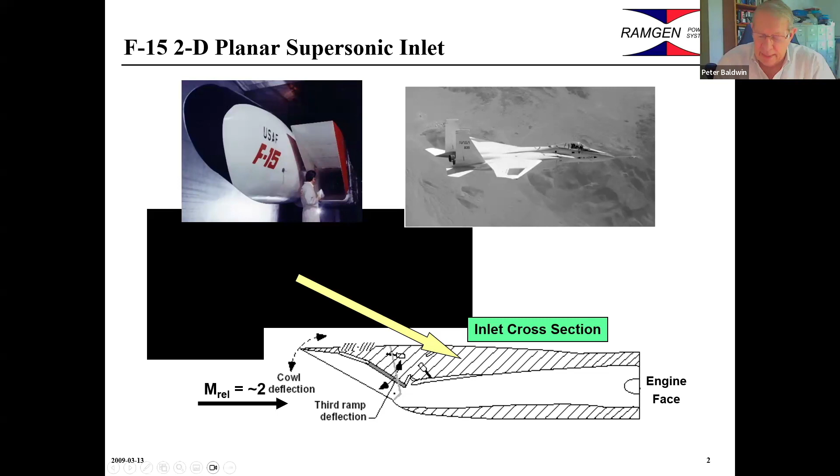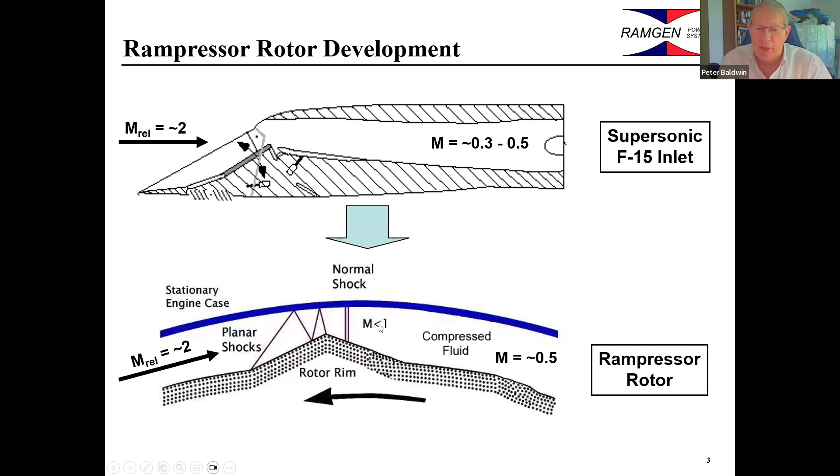The technology uses supersonic platforms, not unlike this F-15 inlet structure where you see the ramp-like structure - this is a supersonic compressor. So what Ramgen did is take that compressor shape and put it on the rim of a disc, then you turn the disc with a motor, and you end up with a developed compressor. You can see this is Ramgen material, showing the attempt to generate and control the shock and use it to boost the pressure.

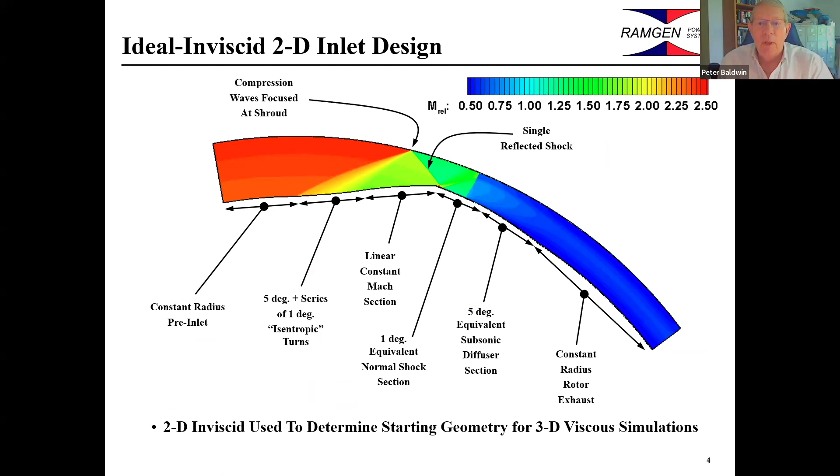We were funded by the Department of Energy to develop the compressor technology, and you can see an artist's rendition of the ramp and the rotor. We talked about it as a single stage compressor technology driven by an electric motor, and we were able to talk about pressure ratios of 10 to 1 on a single stage compressor, which was remarkably high in its day. We were in the midst of developing that, but it was for an air compressor, 10 to 1, which is a market that I knew quite well, having worked for Ingersoll-Rand for 25 years. So here we were on the effort to develop an air compressor.

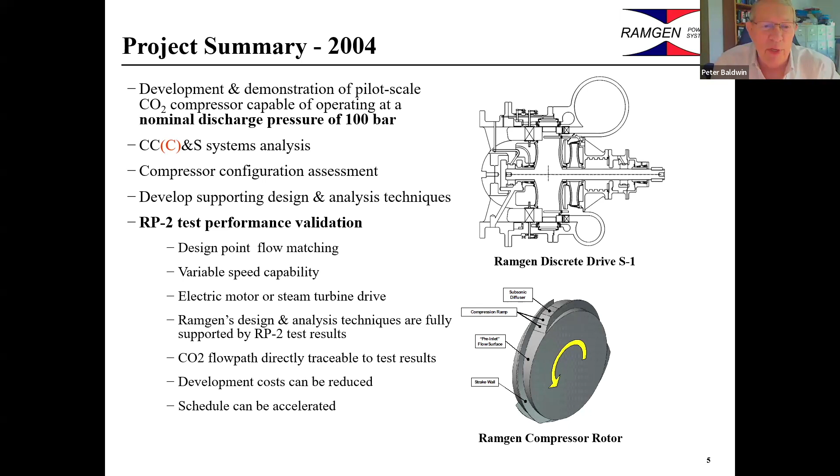Then, quite by coincidence, I was invited to a DOE joint technical session with the Norwegian equivalent of the DOE. I'm in a meeting having a cocktail after my presentation, and I meet this guy named Tore Torp. He was the advisor to Statoil in Norway for CO2 storage. He says to me, Pete, what you need is a pressure ratio of 100 on CO2. And I had an epiphany.

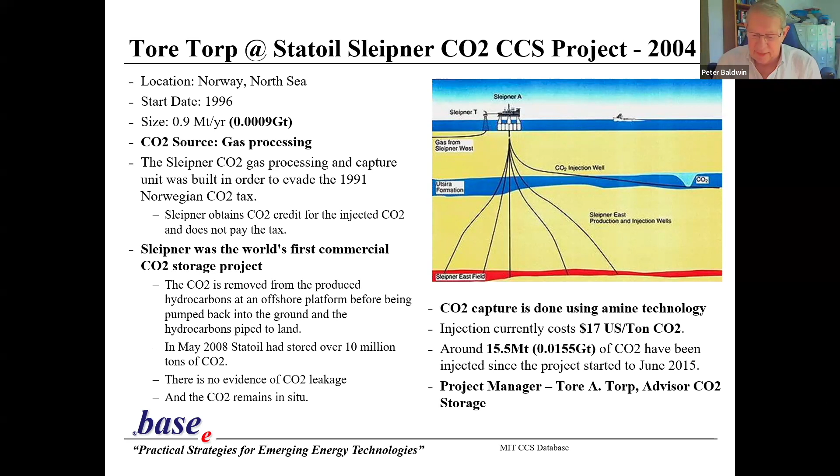At the same time we were funded by Victor Der and the FutureGen program. Here's a rendition of FutureGen 1.0, and then later there was 2.0. Victor Der was the manager of the FutureGen project, and he says, Peter, where can we use your technology in FutureGen? My immediate answer was: compressor, CO2 compressor.

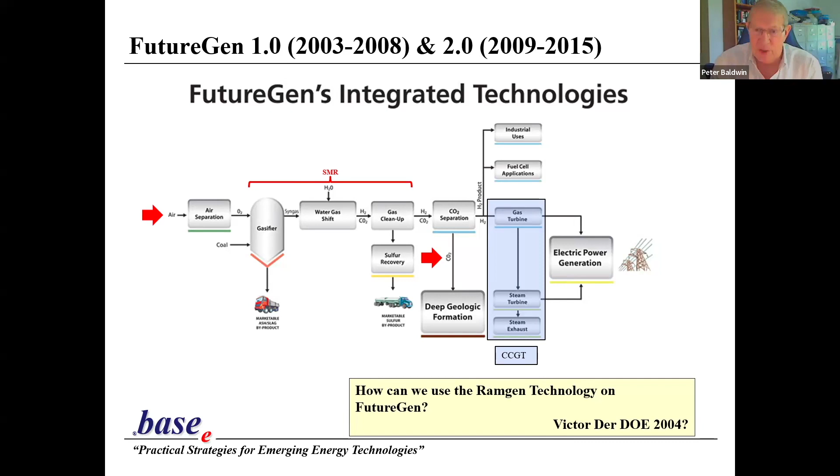The reason why they have intercoolers, and so many of them, is that you cannot get very much pressure ratio per stage on an individual stage of compression in a CO2 application. Why is that? Because fundamentally, when you design a CO2 compressor, you design around a 0.9 Mach number at the inlet. To do that with CO2, you have to slow it down, and when you slow it down, you end up with a pressure ratio of about 1.8 per stage or so. So you get a lot of stages.

The Ramgen technology did not have a Mach number limit — it wanted Mach number — so it didn't have this limitation. We were talking about a pressure ratio of 10 instead of 2. So the compressor application became a 2-stage CO2 compressor for carbon capture instead of an 8-stage machine, and you can understand why the capital cost might be quite different. You also get a 400-degree discharge temperature off the stage that's quite useful in carbon capture, and you can recover that heat in the capture process or elsewhere in the power plant. So it was a pretty compelling story.

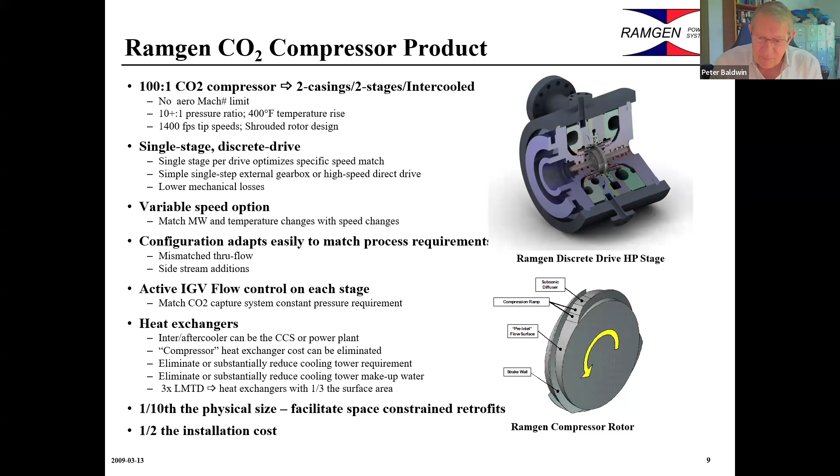Dresser-Rand became an investor in the company. This is the Dresser-Rand test facility for the high pressure stage of the CO2 compressor. It's in Olean, New York. It's a 10 megawatt stage.

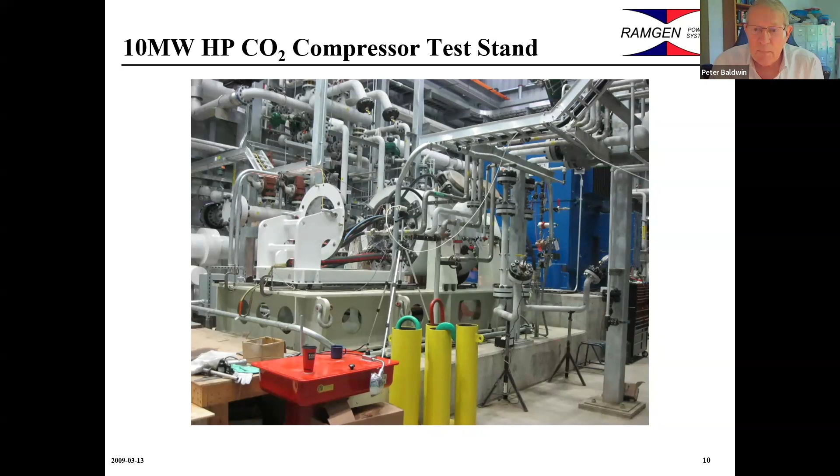As you'd expect, this is a story that generated quite a bit of interest. What you see here is in millions — the activity was quite large, but you can see it peaked around 2010 and 2011, and then dropped down to about half or a quarter of that in 2013.

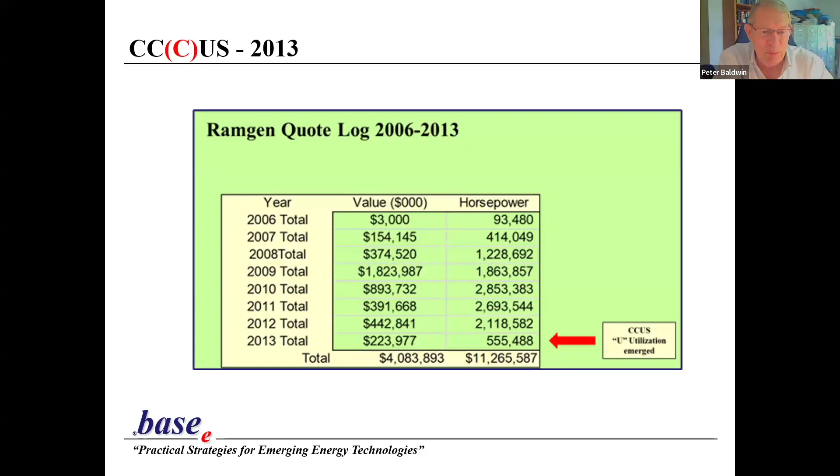Why is that? We began to see regulations that were going to force carbon capture to be used on coal plants, but not natural gas plants. As I started sensing this, I even wrote an article for Turbomachinery magazine titled 'Passing Gas.' The question was, why aren't we doing carbon capture on the gas plants? The answer I kept getting from various members was, well, we're going to do coal first.

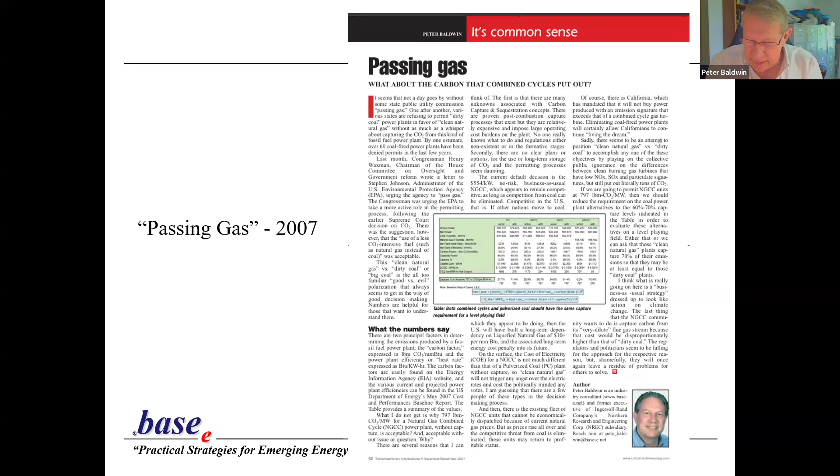So we never did, and then the regulations — the so-called New Source Performance Standards — began formalizing, and there were two versions. One was set up in 2014 under the Clean Air Act, and the New Source Performance Standard levels were introduced in the Clean Power Plan, and that 2014 version applied universally to all power plants, didn't matter what the fuel was. In 2015, they changed that under pressure from industry — I'll tell you which industry — and they went to power plant regulations specific to the fuel type.

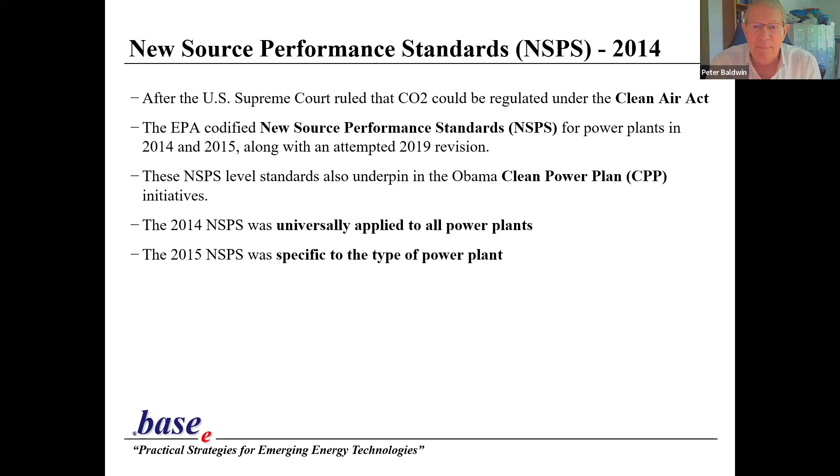Here's the war on coal that began in 2014, actually earlier. What you see is the New Source Performance Standard threshold in '14: coal above the line, gas turbines below the line, and you can see where carbon capture is required versus not required. So the regulations were written to favor gas turbines. This was reported in a DOE article, and you can see the capital cost in dollars per kilowatt with carbon capture versus without is a substantial difference — the first cost is 5 times as much, and half the efficiency.

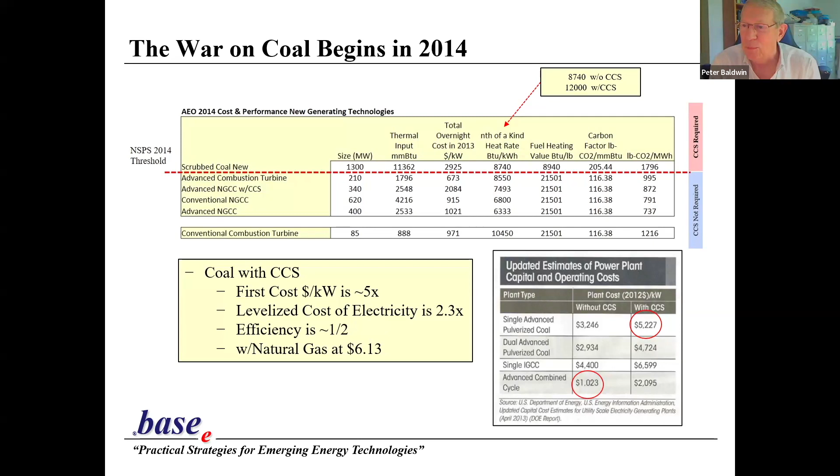So why would anybody? Nobody bought any coal plants with carbon capture — it would be stupid to do that. And no power company was pursuing putting carbon capture on the gas plants either. So there was no interest in carbon capture at that time. Then there were complaints, and they changed the ruling in '15 to a separate standard for each power plant.

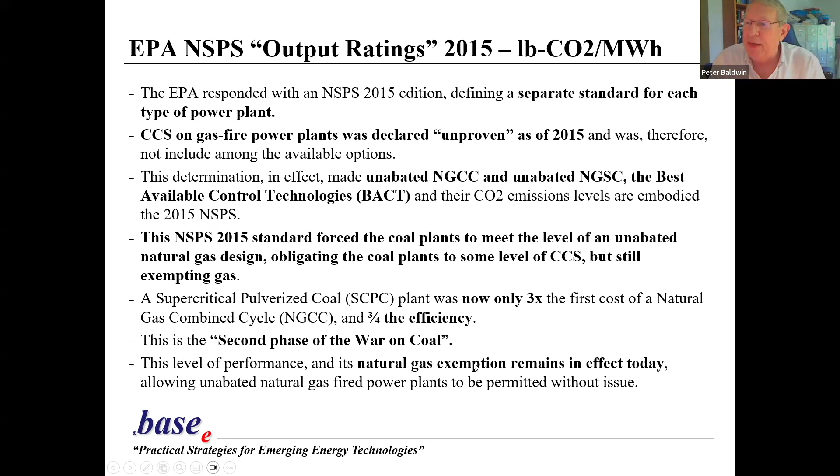Unfortunately, carbon capture on gas was declared unproven. It's the same technology as on coal, but it was declared unproven on gas. And so then also the unabated combined cycle and unabated simple cycle were declared the best available control technology, BACT. And there's another acronym that surfaces later. But it forced the coal plants to meet a natural gas level. Even in the '15 version, it was only 3 times the first cost and 3/4 of the efficiency. But this was the second phase of the war on coal. And natural gas exemption remains in effect today as we speak.

Here's some of the data you can see. Here's the type of plants, simple cycle, natural gas combined cycle. There's a baseline report. Then there's the coal, pulverized coal, supercritical, ultra supercritical. And the standard applicable threshold, there was an interim level and then a final level. And what you can see is that a simple cycle gas turbine on natural gas does not have to meet carbon capture threshold. They meet it naturally. That's how the regulations were set. They were set so that gas did not have the capture and coal did.

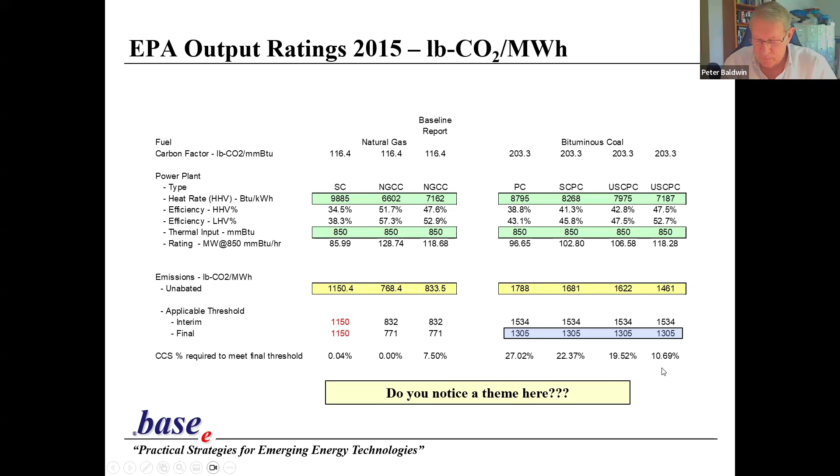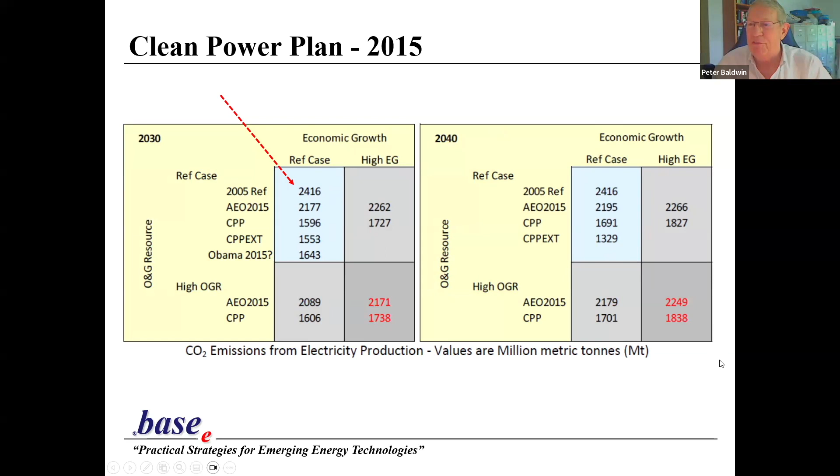Then there was an article written by Nature magazine, and they said, well, how much is this coal to gas shift really worth? And so they started to do a study on it, but you can see the coal to gas shift is this fuel mix thing, okay? And the contribution of the fuel mix, change in fuel mix, they conclude the substitution of gas for coal has had a relatively minor role in emissions reduction of the U.S. since 2007. Minimal. But the Clean Power Plan is largely built on fuel switching.

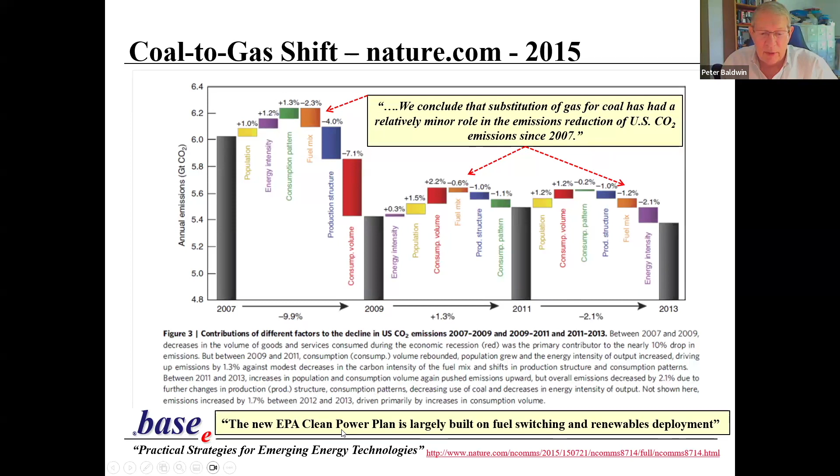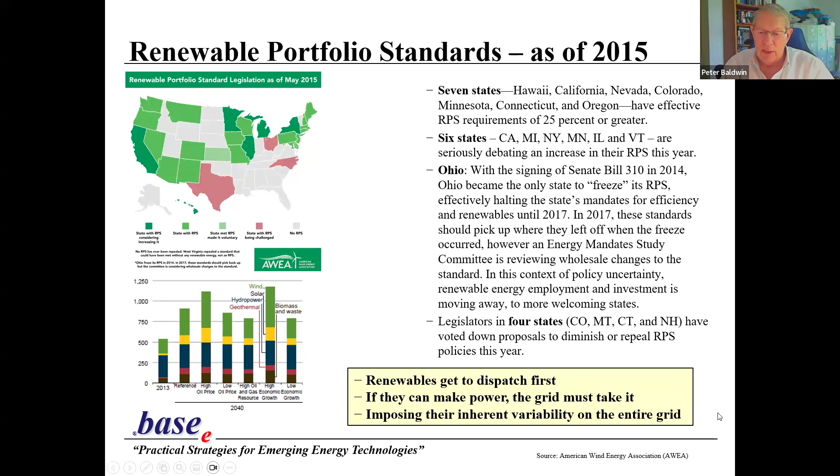Then what happened is the renewable portfolio showed up in 2015. If you're not familiar with it, it's state by state, and there's a percentage of renewables that they want to hit as a target. We have one in Massachusetts, and it's like 25 or 30% of your power must come from renewables. But what they don't talk about is that the renewables get to dispatch first. So if you make renewable power, you get to go, and the guy behind you, the power company's got to make up your variability, which we all know exists. And so they impose their inherent variability on the entire grid. And you get the duck curve.

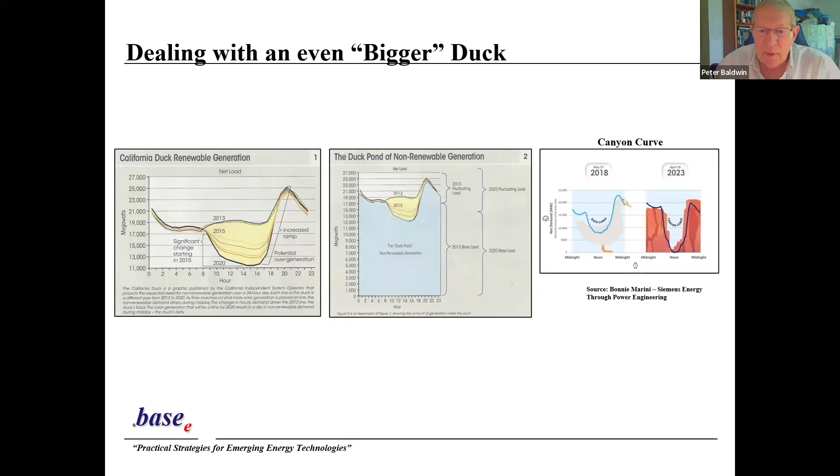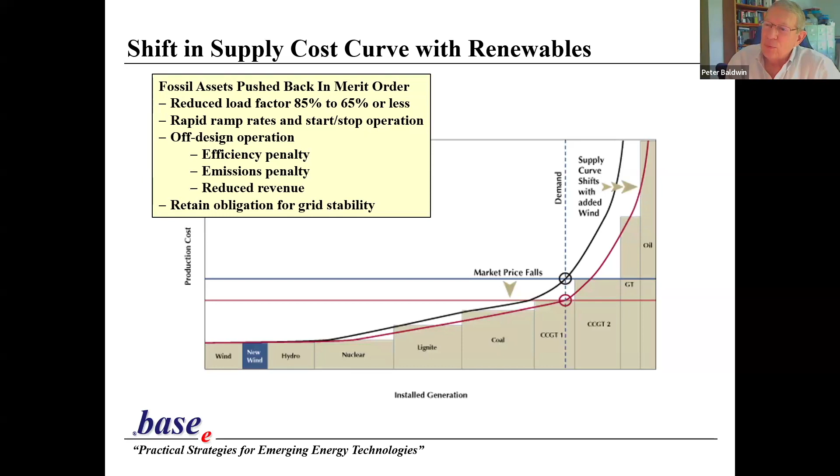This is a duck curve that says, because we got these renewables here, what it amounts to is that the gas turbine has to respond to the duck curve. And it's a pretty substantial portion, but now the duck curve is getting to be a canyon curve - deeper, quicker, shorter. And what happens is that when you have renewables first in the dispatch order, you push the conventional back in the dispatch order. The supply curve shifts with added wind. So what happens is you have an efficiency penalty, an emissions penalty. Your load factor goes from 85 to 65%. You've got to deal with the ramp rates up and down, and you have the obligation to retain grid stability.

Let alone putting a carbon capture system on the back of it. This came out this morning, I'll leave it in the slide deck, but the combined cycle gas turbine power plants are getting more efficient. The heat rate's going down, they're getting better utilization, but still there's a problem because of the load factor.

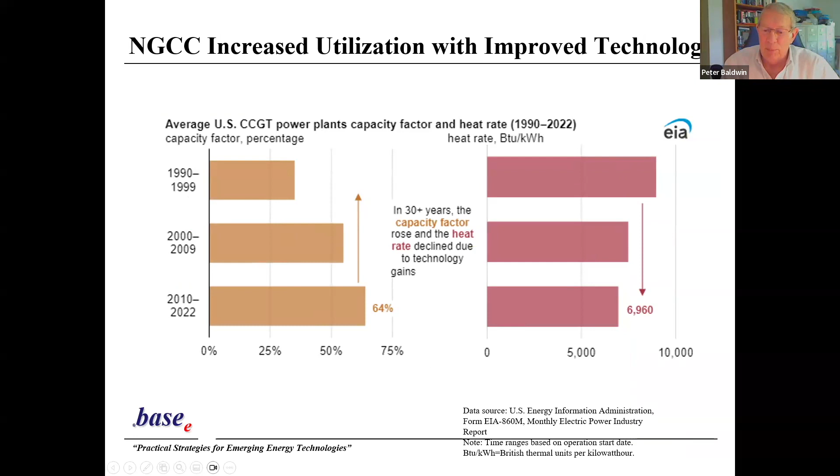Okay, so now the topic of utilization comes up. How much do we use CO2? Let's go to carbon capture utilization of CO2 - how much do we use? This was done by EPRI in 2009, and here's the consumption of gas and liquid CO2.

100 million tons worldwide - this is US consumption. That is the equivalent of the largest 5 power plants. So the largest 5 coal-fired power plants are equivalent to the entire consumption of CO2 in the US. So what are we going to do with all this CO2?

Worldwide, this number is probably 800 instead of 200. So we have a mismatch, a big time mismatch between the CO2 we generate and the CO2 that we can use. So there's a whole effort trying to figure out how we can make use of the CO2.

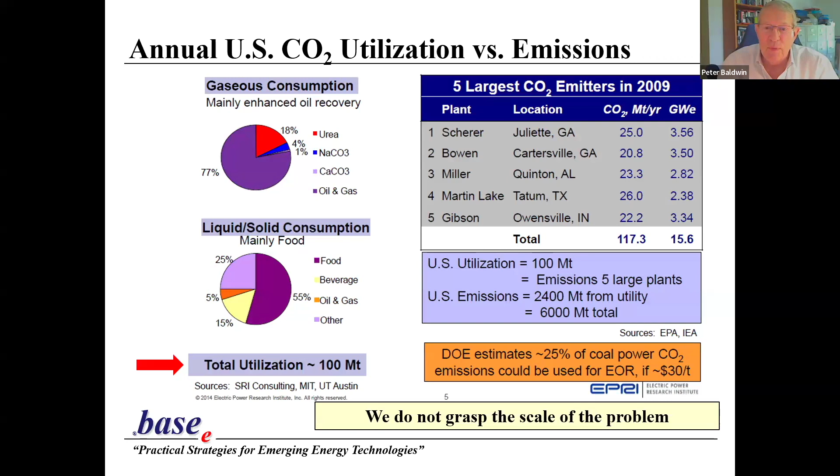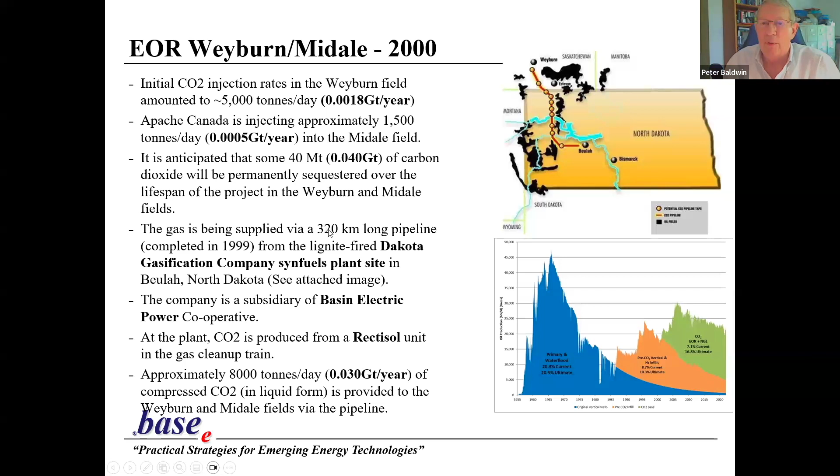At the same time, here's EOR, Enhanced Oil Recovery, a very famous installation, Weyburn Midale. The power plant is located in North Dakota - it used to be the Synfuels plant. They take the CO2 and ship it up to Weyburn, and use it in enhanced oil recovery, one of the fundamental uses of CO2. It allows you to get more oil out, extending the life of the well. It's a pretty big deal, and it's sort of the prototype of enhanced oil recovery, which started in the year 2000.

Then there's Sleipner, where Tore Torp from Norway Statoil was. That was an injection well because they didn't want to pay emissions taxes in Norway, so they figured out how to put it underground in the North Sea. That's where the experience comes from on storing CO2. That was done in 2003.

The enhanced oil recovery basically has an injection well, and it pushes some oil out with it - it's like using soda water to clean a spot off your tie. It's a bit miscible, so you end up with a production well with oil, and you get a little what's called produced water with it. But the payback is a metric ton produces 3 barrels of oil, so you can see it's a good deal if the price of oil is high.

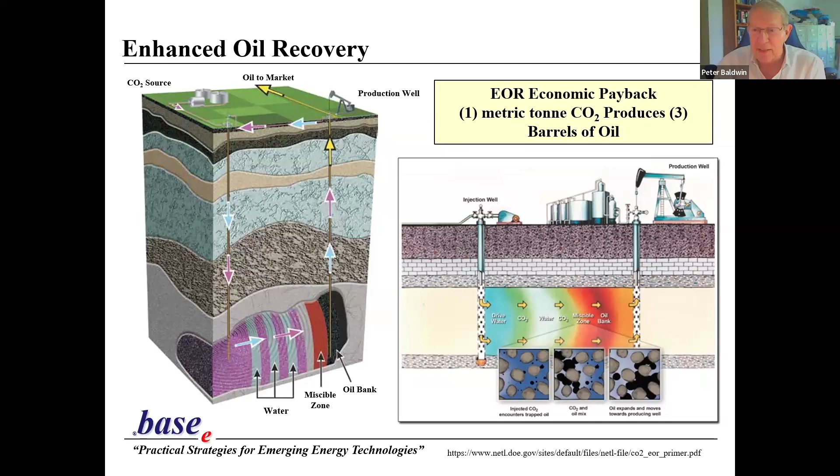If the price of oil falls down to $35, which it did, what happens? In the case of Petra Nova, it shut it down. There are 3 plants when you talk about carbon capture that the world talks about.

This was on lignite, a mine mouth coal project, and they were able to work successfully using an amine process. But as I was told by one of the program managers, even within the same mine, there's enough difference between seams that you can't account for the chemical changes - you have to modify. They could do it, but it was expensive. So they basically gave up on it and turned it into a natural gas combined cycle power plant.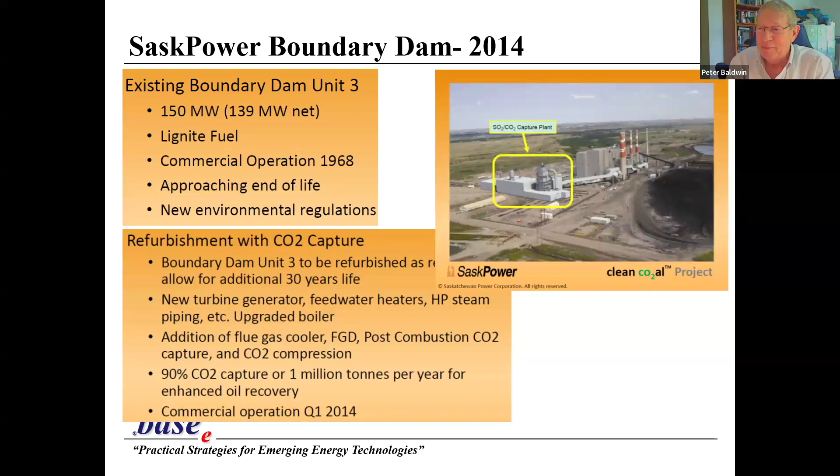Again, the scale - here is the power plant, here is the carbon capture absorber column, here is the compressor system somewhere in here, here's the compressor. I showed you compressors before, so you get a sense of the scale. This is a big deal, and trying to put that on the back of a carbon capture plant is challenging.

Then there's Kemper County, the third one that people talk about. This one was... sorry, let me go back one.

Petra Nova was shut down for a while because the price of oil went to $35. It has now been restarted by Nippon, a Japanese company that purchased it, and they are now beginning to use it again for enhanced oil recovery.

Here's Kemper County in Mississippi. Again, this was an interesting observation: IGCC on very wet lignite, a mine mouth system. Kemper County, Southern Company invested in this carbon capture technology because they were able to use it on this lignite. But you can't ship wet lignite because it catches fire in the train car, so you have to use it where it was. It's a bit of a jobs program, I think.

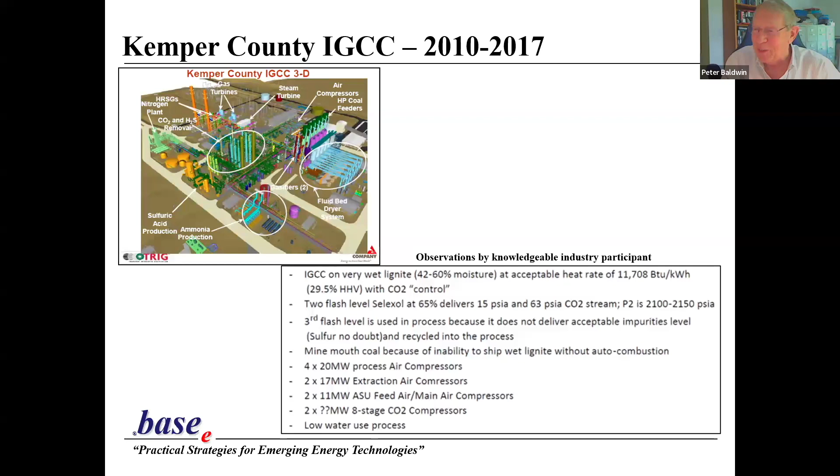It was a very complicated system and they did not complete it. They basically turned whatever assets they had back into a combined cycle natural gas power plant, unabated again, as usual, to rescue the investment.

There's another paper, an interesting benchmark, written by Timothy Grant. He's a DOE guy. I got to know him when we had intended to have a carbon capture conference in Boston. I had a couple of really notable people, but nobody signed up. This was in 2018, and nobody signed up in '19. But this was an interesting benchmark for an electric power plant. The capture costs roughly $60 a ton, transport $11, storage $33. These are good numbers, I think, to use to do any evaluation of CCS.

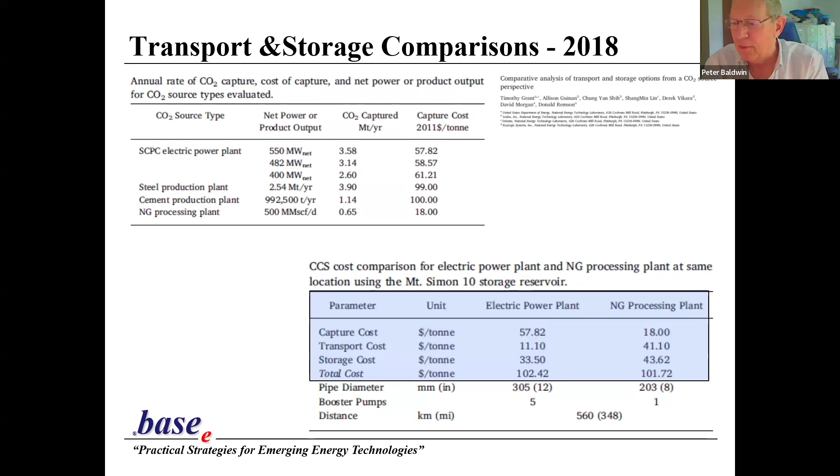Again, this is something you've seen before, I just wanted to reinforce it. This comes from Lawrence Livermore, and importantly, here's all of the energy that we buy and here's how we use it, through the Sankey diagram. Importantly, the rejected energy is two-thirds. We waste or throw away 67% of the energy that we buy. Notably, power generation is 35% efficiency, because here are the inputs, here's the output. You do the math, it's 35% efficiency.

The so-called hard-to-abate industrial emissions, they do pretty well at 51% efficiency, but these would be the industrial emissions, the hard-to-abate ones. And then you have the transportation sector, where the input-output is 21% efficiency on the transport sector. We've got a lot of work to do.

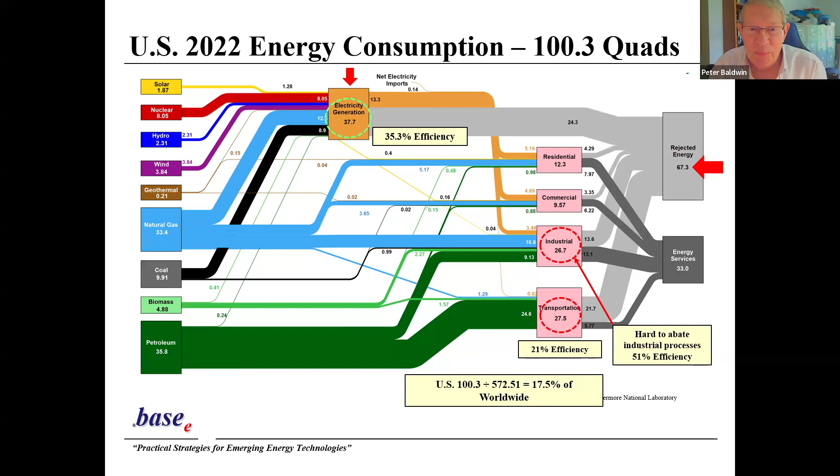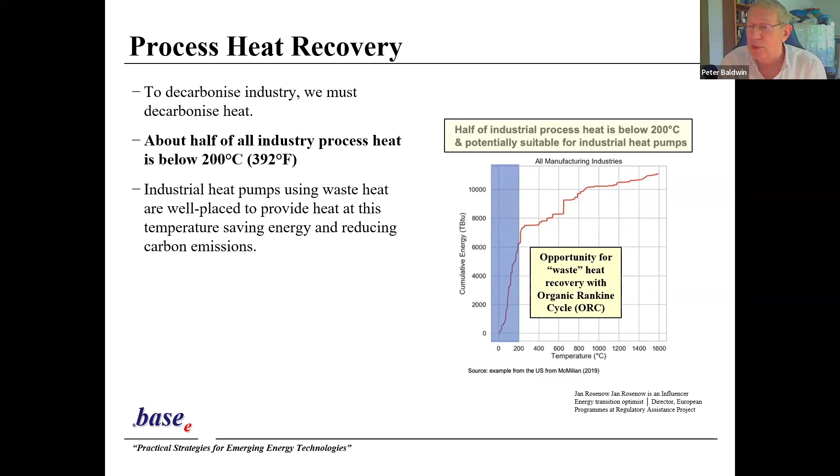One of the interesting slides I picked is process heat recovery. This is the hard-to-abate portion, within that 67% rejected energy, where most of the heat is rejected at temperatures that are quite low, which is why it is hard to capture. The only way to deal with this is using organic Rankine cycles to try to capture the waste heat. But about half of the process heat is below 200 degrees centigrade, which is why we waste a lot of it.

Then we had the COP 26, 27 meetings. This is the IPCC, the worldwide climate meetings that happen every year now. 26 was in Glasgow, 27 in Egypt, 28 in Dubai, and it's going to be in Baku for 29. The Cliff Notes takeaway is, one, we're not making the target. And so in order to square the circle, we have to create negative emissions to capture the overshoot, and that's a substantial amount.

So the strategy here involves a couple of things. We have to build out the grid to accommodate the transition, and we're building it out with unabated gas-fired generation now, as we speak. Then we're going to do these hub initiatives, capturing H2 in hydrogen hubs. But in order to make the hydrogen, we've got to have an associated CO2 hub to capture the carbon that's generated when you make hydrogen from natural gas. And then we have to rely on negative emissions to deal with the overshoot, one of which is direct air capture. So what you're seeing is an underlying strategy of the natural gas industry to stay in the game by promoting hydrogen.

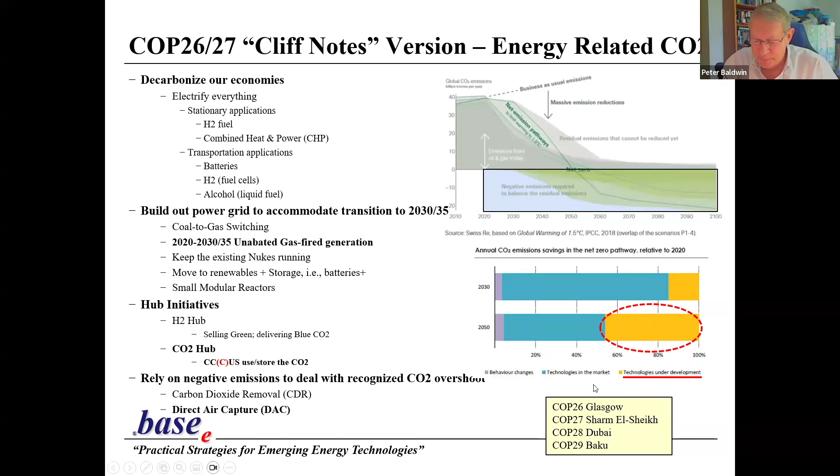Recently, April 2024, the EPA has finally reset their power plant standards, and they've created some new language. You have gas-fired combustion turbines, some baseload high-capacity machines, and there's a phase 1 and phase 2. Phase 1, we don't do anything. Phase 2, we have to get 90% capture by 2032.

There's intermediate turbines with lower capacity factor, some wiggle room here, but it's basically a simple cycle turbine. Then you get the low load, real peakers, less than 20%, standards based on low emitting fuel, whatever that might be. On coal-fired plants, you introduce terminology, long-term units - are we going to keep these things, or delete them after a period of time? If you're going to keep them long-term, you have to have operating beyond 2039, you have to have a plan, and by 2032 you have to have the data. So the guidelines are basically not too difficult.

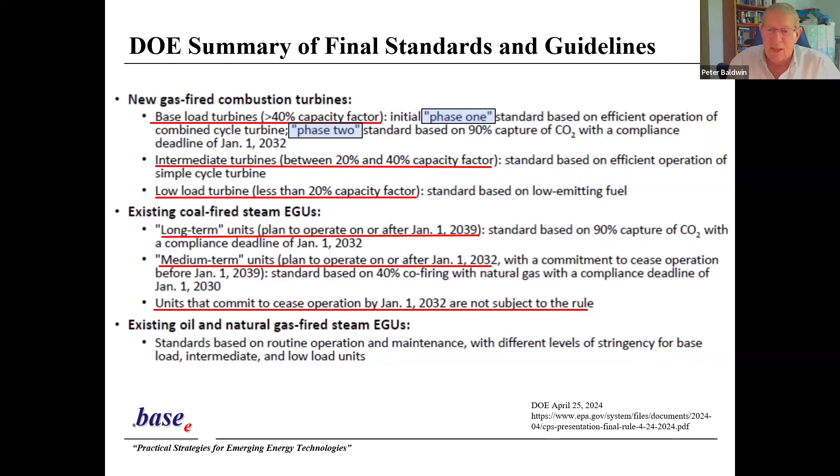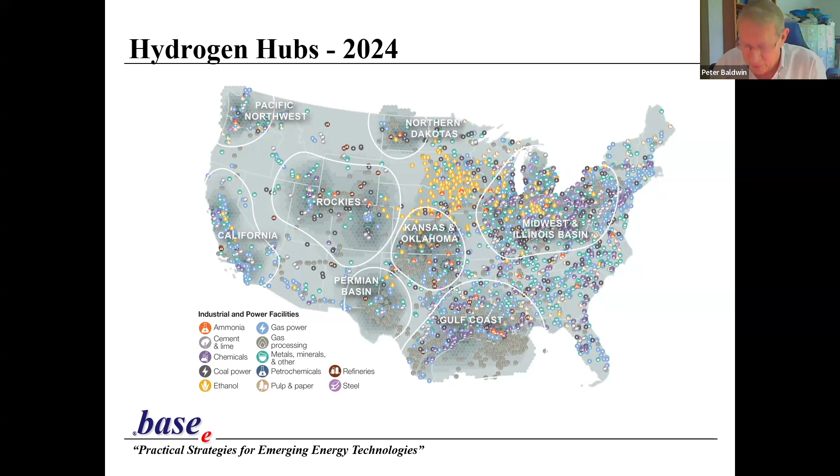Then we have these hubs that I mentioned earlier. This is a picture of the hydrogen hubs - looks like I cut Texas out - but the Inflation Reduction Act is providing a lot of money to support development of hydrogen hubs, because we're going to use hydrogen instead of natural gas. We're going to put hydrogen in with the natural gas, mix it, try to use it, and maybe even get to the point where our systems are entirely hydrogen.

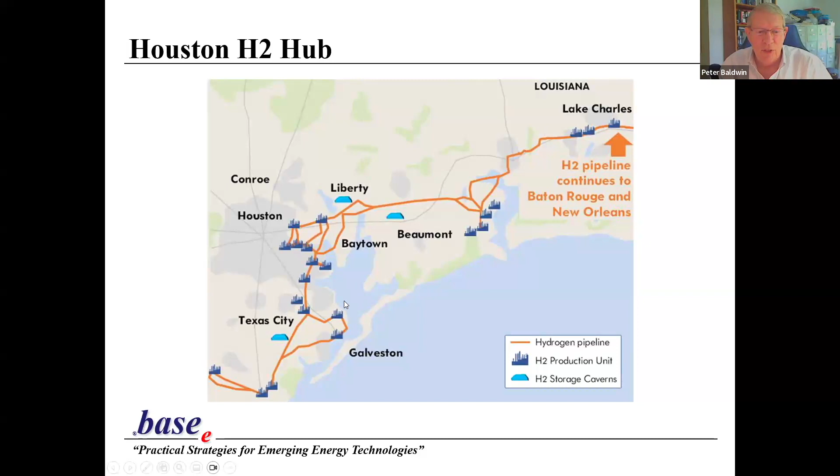And the idea is you have a hydrogen hub - here's a picture of one in Houston. Houston's a good idea because it's got a lot of stuff there anyway. So we're going to create a hub complex and a pipeline to share amongst brethren and the like.

I showed you Future Gen earlier. There was a Future Gen 1, which failed because of its complexity, and a Future Gen 2, which also failed because of its complexity. We now have what I'll call Future Gen 3, 4, and 5, various methods of creating hydrogen from natural gas. Each one has carbon capture on the back end of it. That is why there's such interest in carbon capture today, because it's behind the need to continue natural gas existence by turning it into hydrogen - but we've got to do something with the CO2.

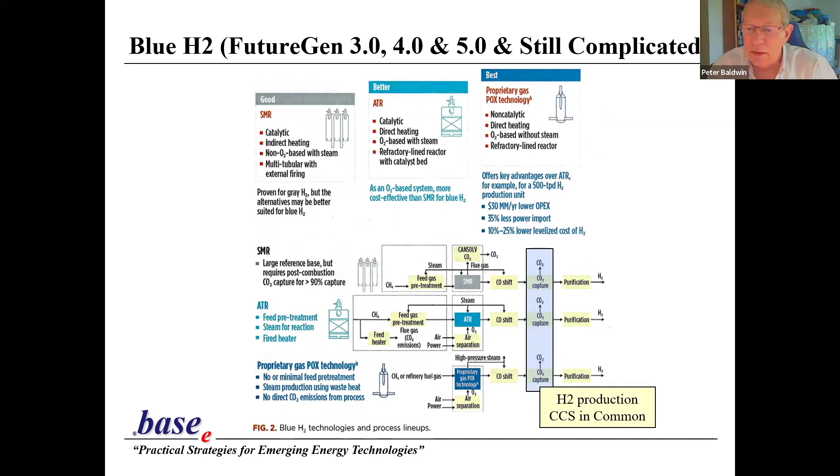So we've now rediscovered carbon capture and storage, which we saw back when coal plants were being built, but now it's resurfaced in the form of producing so-called blue hydrogen. So we have these hubs - CO2 hubs and carbon capture hubs - which give us an opportunity. I like CO2 hubs, I think it makes sense. I'm not a fan of hydrogen hubs, but I think CO2 hubs are definitely in our future, coming from industrial processes and the like. So we're going to need hubs to collect it.

There are other things feeding the hub. We're talking about geoengineering methods - you have the airborne stuff, and then carbon dioxide removal, these negative emissions approaches. Here you see direct air capture, and there are all sorts of various methods under discussion for negative emissions. They were funded through 45Q credits for direct air capture - you get $180 a ton for direct air capture if it's stored in saline, or $130 a ton if it's used for enhanced oil recovery.

There's a lot of subsidy to do direct air capture. The other thing they did is take it down into very small sizes, so some of these small scale plants can actually qualify. The regulations are being set up to encourage and support direct air capture.

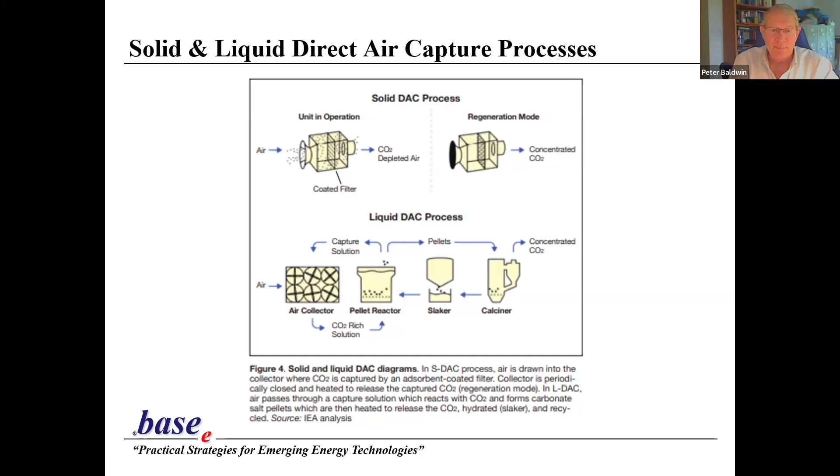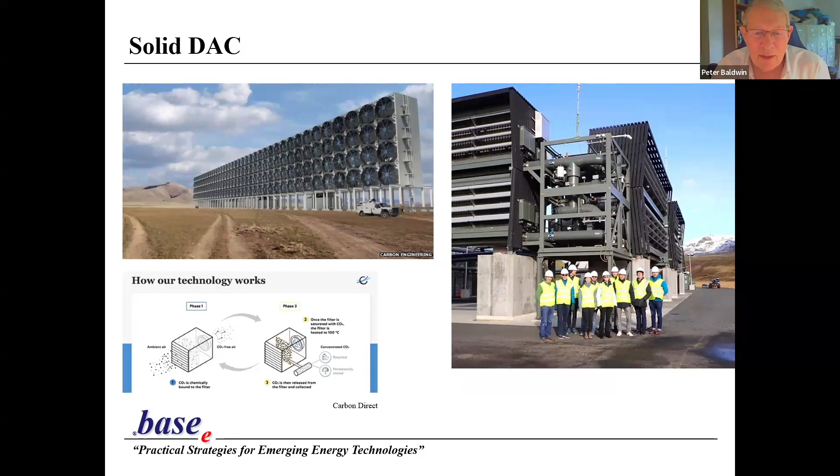These are renditions. This is a real picture of a direct air capture, Carbon Engineering, and this is the array you'd get to experience if you did a whole slew of these things. That's solid. To have a real project, you have to do something like this. Every time I see this, I worry about the poor maintenance guy riding his bicycle around trying to figure out where in the hell all these things are leaking. It's mind-boggling that this would be a rendition.

I do not see any utility support for this. I don't see a power plant, I don't see piping, I don't see compressors. I see fantasy. And you need 200 of these to do a gigaton. Anyway, that's direct air capture.

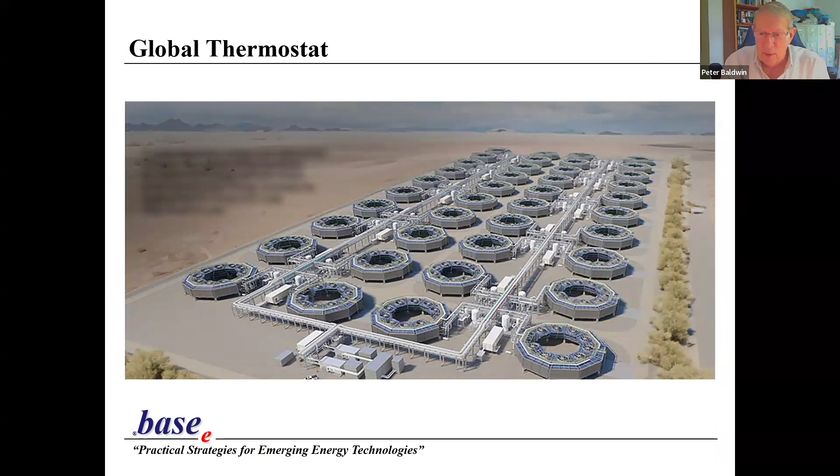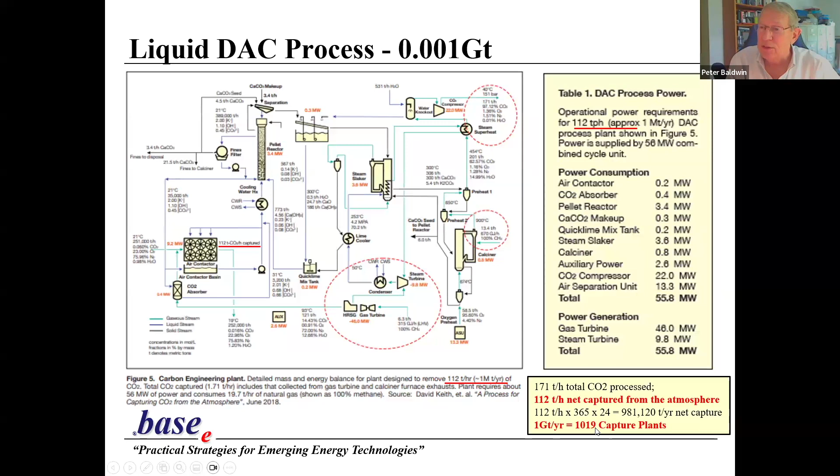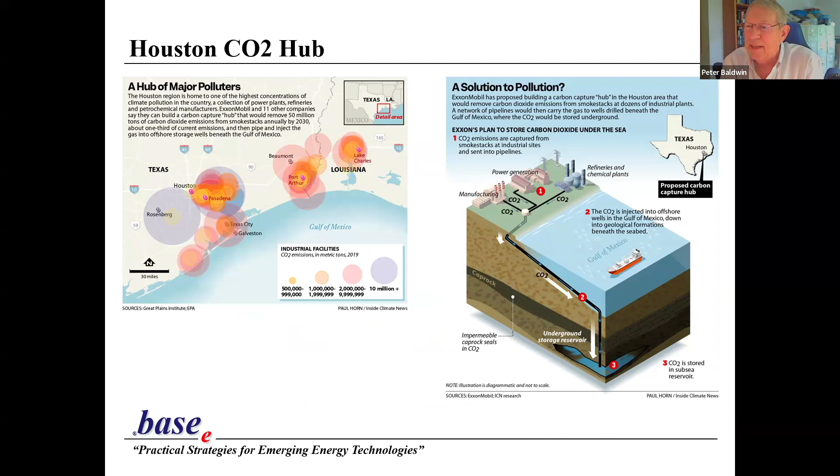And then you have, what are you going to do with it? Well, I think it's like the hydrogen hub - we're going to take it here, capture it in these hubs, and put it underground. I don't have a problem with this; I think this is where we're going to get to. The only issue is where's the CO2 coming from? That's a complete unknown to me.

There are real life projects going on in Europe. There's a Rotterdam Porthos project - you can see a picture of it. The idea is to capture CO2 concentrations in the Rotterdam area and take it offshore to put in the North Sea. They're using 3 of those big compressors I showed you in the earlier slide.

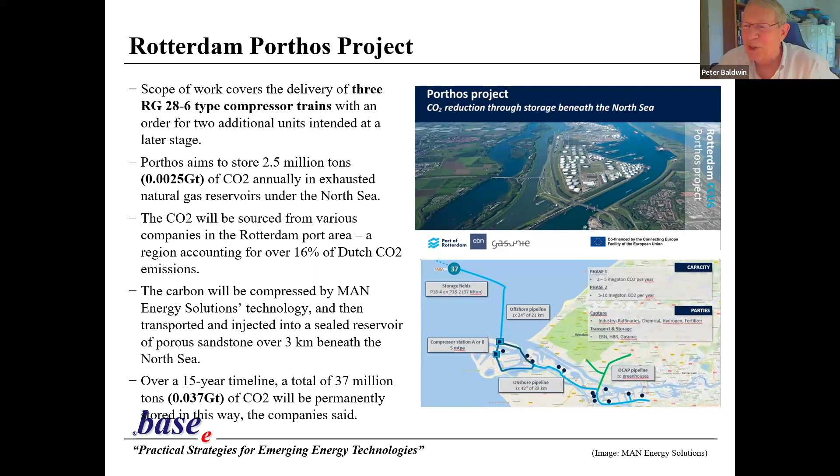This goes to the carbon dioxide removal costs. There's a bunch of technologies - here's direct air capture and the cost per ton. The IPCC AR6 estimate is 100 to 300. Today prices are 300 to 2,300. It's too expensive in terms of capital costs, and these are notional attempts.

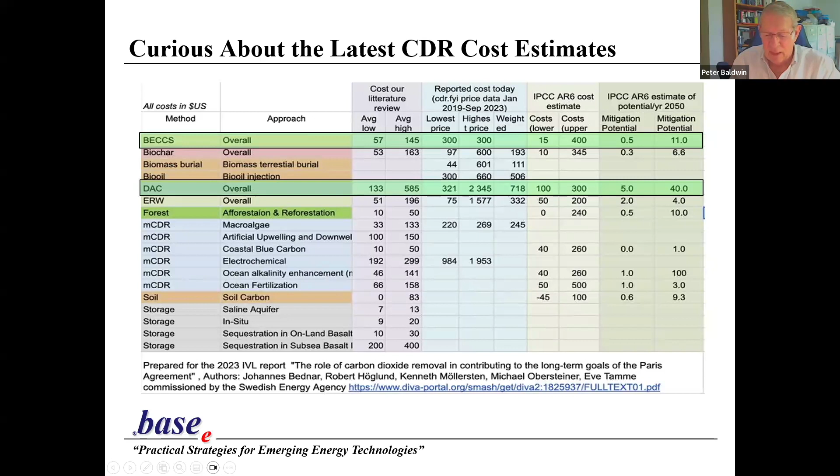You have all sorts of other types - these are chemical and agricultural approaches and things like that people are working on, and their relative costs. One of them, recently, today, May 1st 2024, Frontier signed a deal with Vaulted Deep. These are names I don't know. Frontier is a commercial negotiating platform, and Vaulted Deep is the one who puts it underground - they were putting it underground at $421 a ton, if you can believe the numbers.

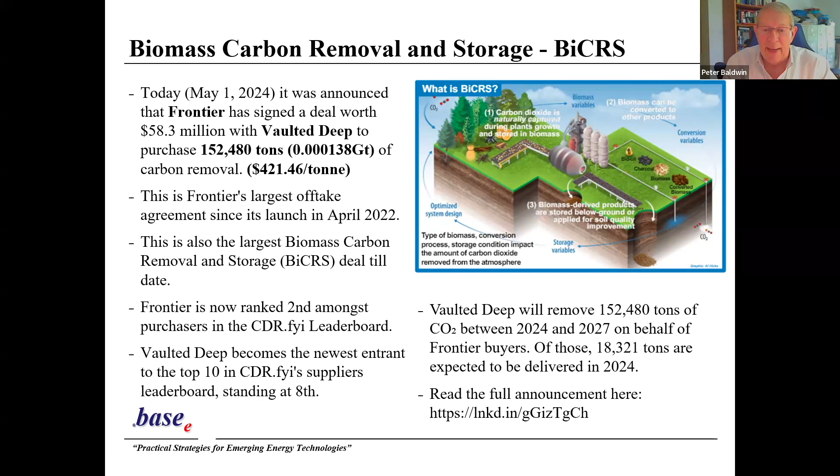58.3 million dollars and this many tons - that's a lot of money compared to the chart I showed you. But there's also this carbon dioxide removal leaderboard where you can buy and sell credits. Here's the Frontier buyer, and here's Vaulted Deep - same numbers, but we're talking about relatively small quantities at this point in time.

Another tell: here's a Carbon Capture Technology Expo in June, this month coming up, and here's the conference agenda. This is the tell - here's the conference, and over here you see carbon capture, utilization, storage, and blue hydrogen. And then you see the agenda.

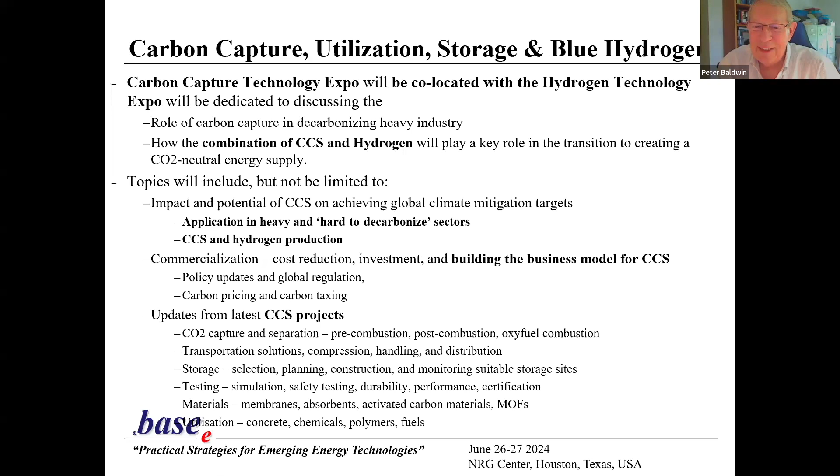Co-located with the hydrogen technology conference, we're talking about the combination of CCS and hydrogen - application in hard-to-decarbonize, CCS and hydrogen, building a business model for CCS. So it is about hydrogen. Carbon capture and sequestration in the discussion as we speak has two roles. One is the production of hydrogen to keep the gas industry alive, because they're basically looking at it as a way to continue their existence - it will make hydrogen out of methane.

And the other is developing a utilization industry of CO2. I think there's a mismatch there. The big challenge: can you make it back into fuel? And it's an energy problem to do that. So storage is in our future, and the hubs for CO2 are a good idea because it builds out the infrastructure and the pipeline. It's just, where does the CO2 come from? And so that's essentially what's going on with carbon capture.

I'll open it up to questions at this point.

Well, thank you, Pete, for a not only comprehensive, but absolutely mind-spinning presentation. Well, the interesting thing from my perspective is it just seems to me that there are so many different initiatives and so many different potential approaches that I wonder.

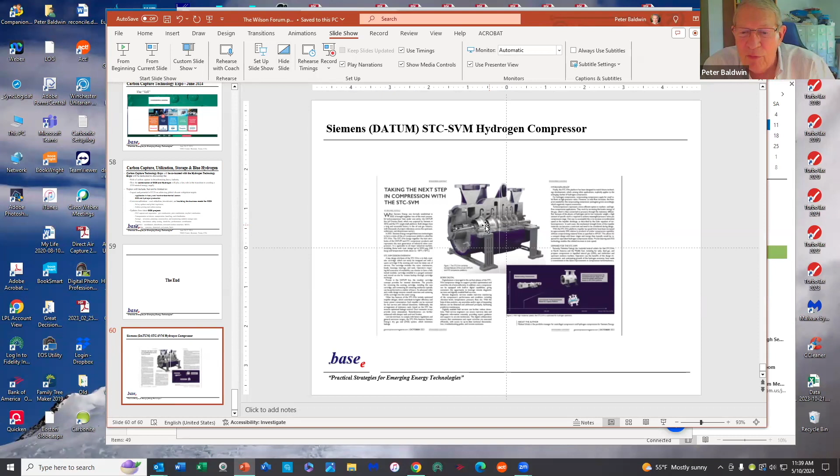I do see this cutaway of Siemens' barrel machine, and I see a couple of front end shapes on this thing—let's see, from the current slide—that look suspiciously like the Ramgen technology. It's on hydrogen, so the Mach number is low, so you may be more challenged. This is more likely a high specific speed mixed flow machine, but it looked suspiciously like what we developed. Aside from that, I can't tell you what happened within Siemens, other than to my understanding, it's on the shelf.

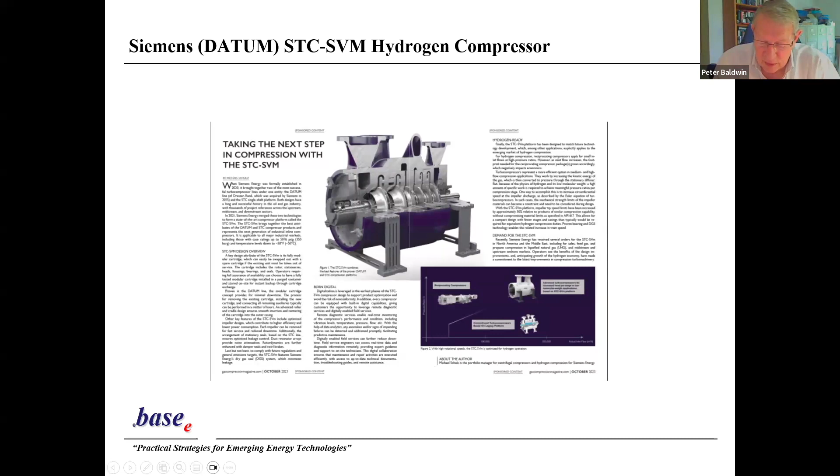But my question is fundamentally, was it abandoned because other technology already existed and they were invested in that, or was it not as good from an efficiency point of view compared to what's available? The bottom line is at that scale, with two stages, we were a little shy on efficiency, and the control range was challenging. Those problems could have been worked on and resolved, I think, but you have to combine that with the fact that Siemens owns their own technology.

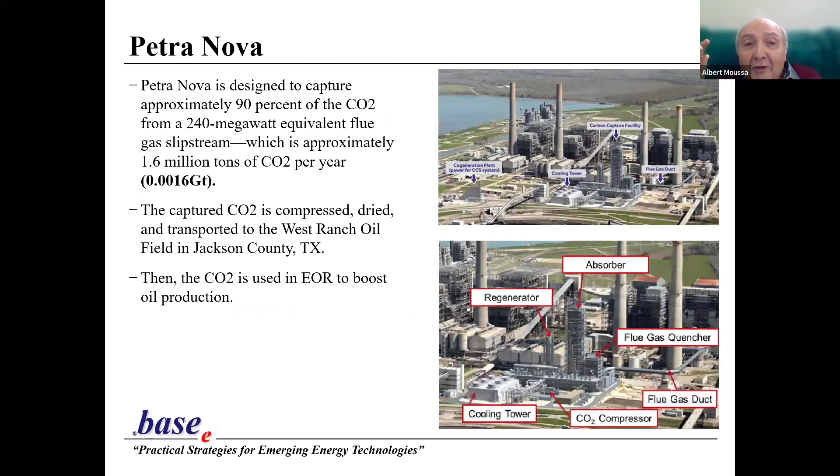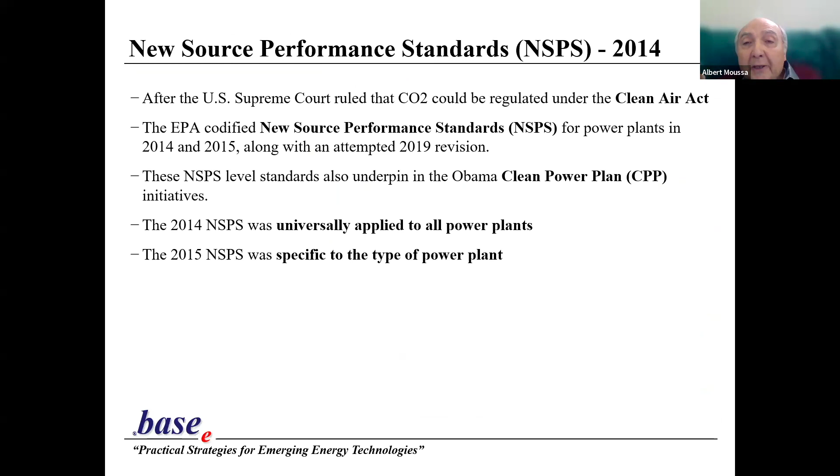Okay, clear enough. Now, my next question—I agree fully with you about the craziness of trying to do direct air capture. What I can't understand is why so much money is being put into that, and capturing it from, let's say, a simple cycle gas turbine is not being looked at. You would still think that regardless of the efficiency of the turbine, it's easier to capture it from 10% CO2 than 0.04%.

Yes, well again, the regulations initially by the EPA were never resolved. The 2014 rules made coal plants—carbon capture applied on a gas plant was declared unproven, and it was lost in this best efficiencies, BSER standard. So it was lost in the regulations. There was no forcing function and no price on CO2, so there was no driver to consider it.

It's sad that it slipped. I mean, yes, perhaps so, but now one should revive that as opposed to going with direct capture. Well, the problem today is capturing it at the power plant—we're using batteries to do the peakers, and the load factors are low, and nobody wants to spend the capital to do all this fancy stuff on a machine that's only going to have a load factor as a peaker.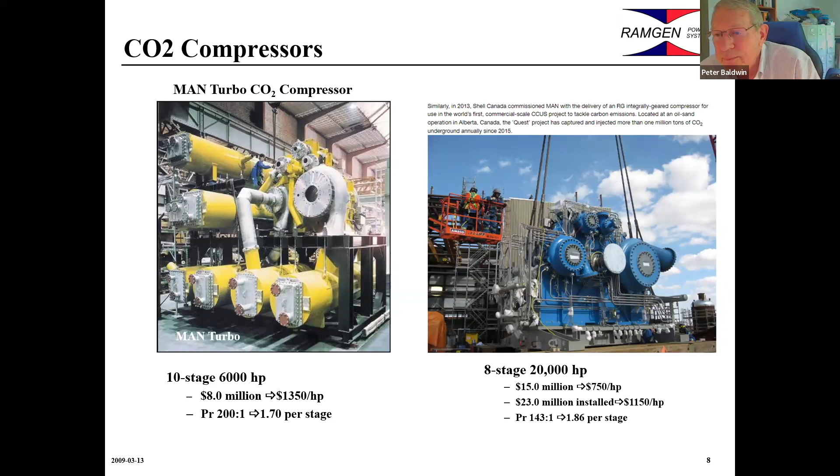Thank you, can I say something, Pete? Go ahead, Harry. I'm sorry, I don't know how to push the button to raise my hand. Okay, go ahead. I guess there's a couple of things. You folks who live in Massachusetts are not too far from Bellingham, Massachusetts.

In 1990, they built a combined cycle plant with partial carbon capture, and they used the CO2 in bottling 7-Up down the road. It turns out that the EPA ignored the existence of that plant until these new regulations came out. And when you read the EPA documents that are published, they mention the Bellingham combined cycle plant as having proven that carbon capture on gas turbines works. That's why they could justify, along with Petra Nova, pushing carbon capture on existing and new power plants.

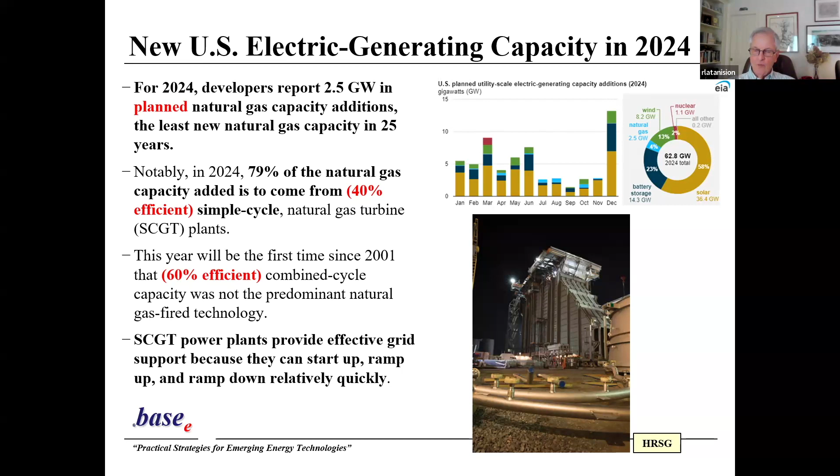I start thinking of thoughts like the following. We know there is a supply of CO2 on this planet. There are sources of all kinds, from combustion engines, etc. There is a demand for CO2 in terms of natural photosynthesis, and demand from man's use of carbon dioxide in carbonation of beverages and so on. So there's a supply and a demand, but the balance is what's troublesome, isn't it? It's what's left over. Yeah, it's the balance and also the speed. You could argue planting trees, but there's a speed issue that has to be addressed. Well, let me continue.

What my concern is, having heard what you described eloquently in terms of all the permutations of approaches being considered for managing our carbon dioxide excess, I think there needs to be some kind of focus. My initial comment about combinatorial approaches was a thought in that direction, to provide some sort of focus. But I have another suggestion. What if the world were to say there's an ideal approach to managing carbon dioxide, or we'd like to suggest there should be an ideal approach. That approach would be, first, to remove carbon dioxide, and at the same time, to produce electricity, and to take the products of that generation of electricity and use them in some other natural, corporate, industrial sense.

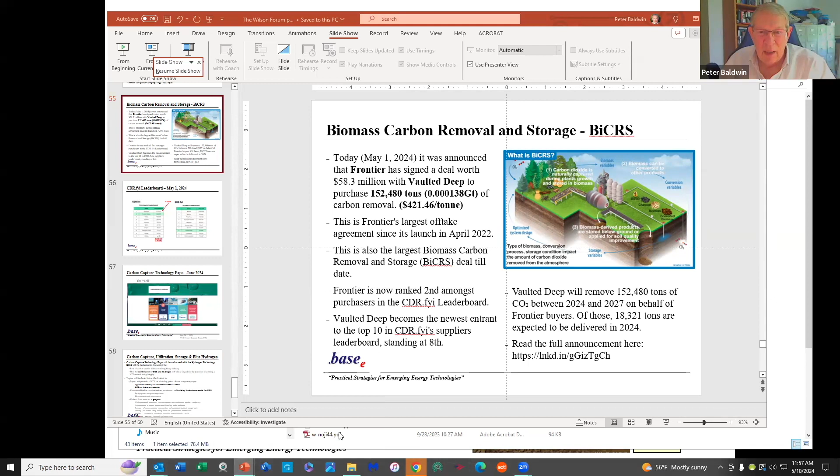But wouldn't it be useful if there's some way of saying, well, we could do that, but it's not going to meet our goal, let's remove it, so that there's some kind of focus? I'm hung up on this, I apologize for that, but I really am. There's not one answer, that's the problem.

Yeah, I know there is not one answer, and there never will be one answer. These conversations date back to Princeton's work in the year 2000 or before. Wedges. These are wedges in a different arrangement, but it's not one size fits all. You got to do all of the above.

So where do you think we're headed, though, Pete? I mean, where does this go? We're headed for some more disasters.

Yes, that's true. Well, that's not a good conclusion. No, it is not, I know. But you asked me where we're headed, and that's kind of where I think we're headed - in the long term, a reduction in population.

Didn't you write something about that in one of the articles? I think it's the long term price on CO2. Yeah, I always say in the long term the planet's going to win. The planet's not going to have a problem in the long term - we're talking about billions of years of going through all this.

So man has got a couple of hands up, Eddie. Yeah, Eddie, and then Avi.

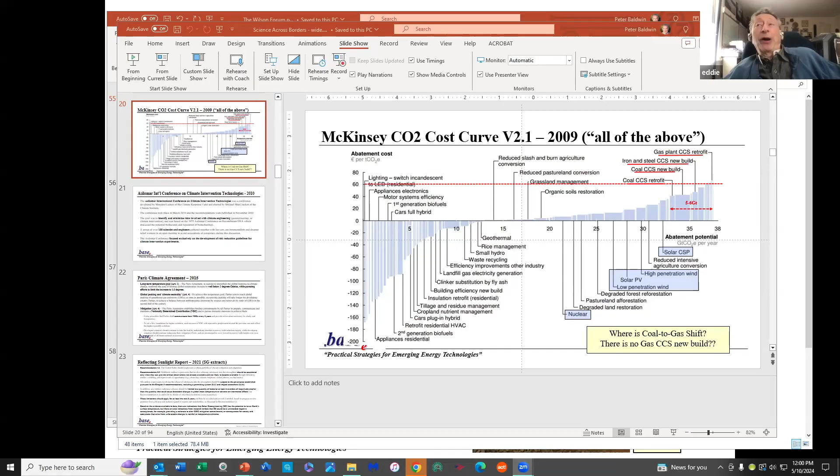I'm gonna basically make a simple statement that with current technology, we just can't get anywhere. The only hope we really have is the evolving technologies that are carbon-free and provide massive amounts of energy. I'm hopeful that might occur, because I'm seeing signs of nuclear fusion and advanced geothermal, for example, coming along. And it's power that will get us out of the mess. Because then we can do other things.

There's also other ways of producing hydrogen, which do not involve electrolysis, but involve catalysts, and I believe those are coming along as well. So I'm not all gloom, but I think we're going to go through a heck of a time, and my poor granddaughter is going to have a heck of a time in 20 years, far more than we are experiencing today.

I'm naive with this subject, but it occurs to me to ask - is there any way of using organic principles? We know that through photosynthesis, plants convert carbon dioxide into oxygen. Is there a way of doing this on some grand scale, so that after you capture carbon, or even if it's uncaptured, this could be used to at least approach the problem? I think there really does have to be multiple approaches to find out which one works, but I don't know if something like that would provide any kind of assistance.